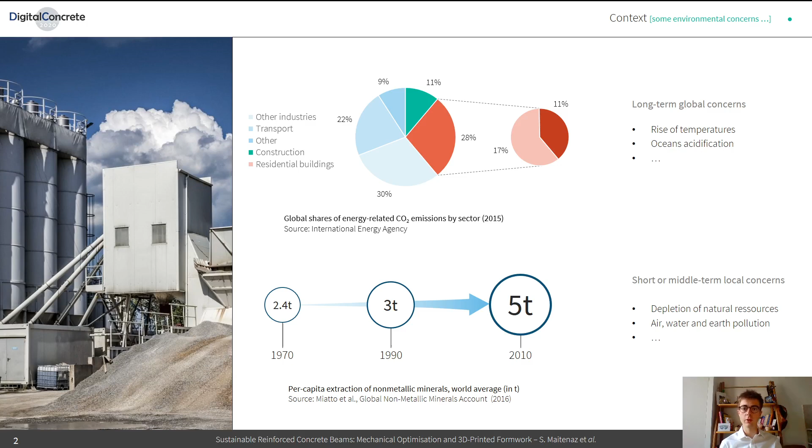Strangely, the construction industry also faces a trend for the oversizing of elements, and the reasons for that are twofold. One is the evolution of cost over time. At the beginning of reinforced concrete systems, at the end of the 19th century, the costs for the production of construction material were high, whereas the labor cost was low. But with technological progress, we were able to reduce the cost of the production of construction material. And with inflation and modification of labor legislation, labor costs tend to increase.

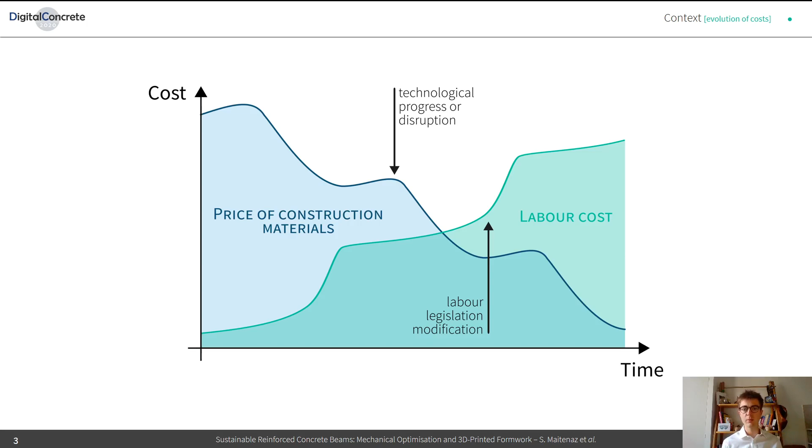Now, general contractors tend to foster the oversizing of structural elements to ease and fasten the construction in order to flatten the impact of the labor cost. Another reason for this oversizing has been highlighted in a survey conducted on 129 chartered engineers in Great Britain, published in the MEICON Report.

This survey clearly shows that structural engineers tend to oversize structural elements because of potential construction mistakes that could occur on site, even though the standard already includes some high security coefficients to take those potential mistakes into account.

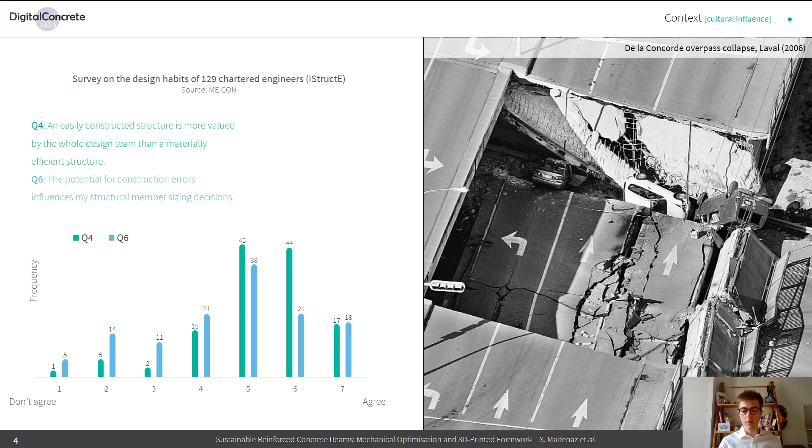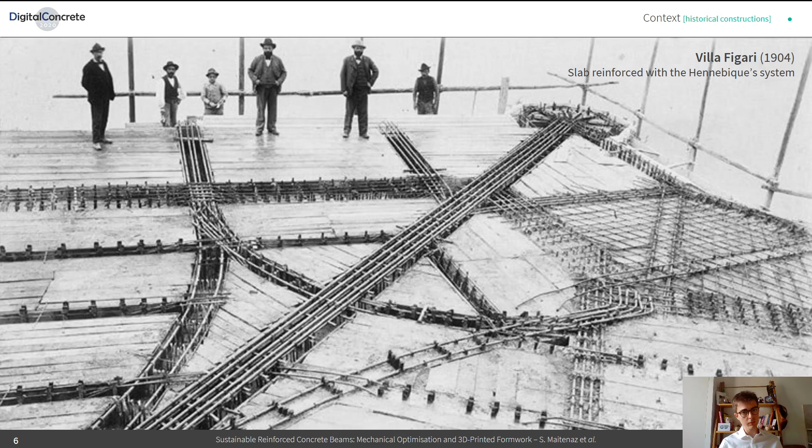But examples from the past, like this slab that was reinforced with the Hennebique system in 1904, show that it is possible, with reinforced concrete, to have structurally efficient structures. Actually, the Hennebique system was the first widespread reinforced concrete system because it was the simplest way to reinforce structures at the time.

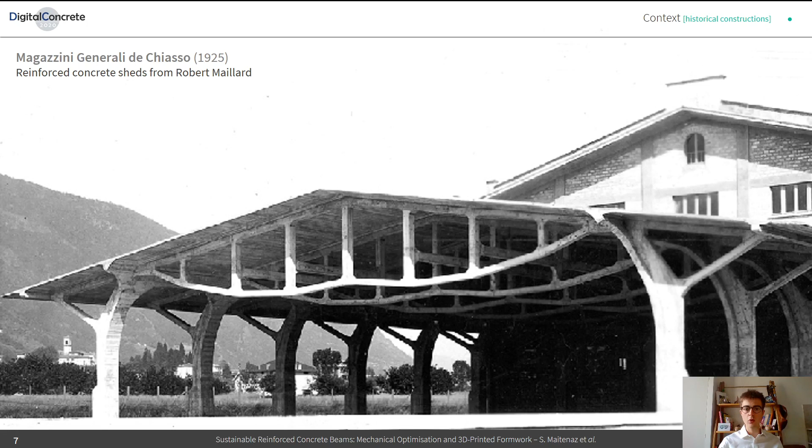Some of you might also have in mind some very nice and efficient designs from Robert Maillart, like his bridges or the roof of the Magazzini Generali.

So what we want to do is to take advantage of digital fabrication to meet the challenges at stake. Those challenges are a better control of the fabrication process and a higher precision, a higher productivity, and above all, a higher sustainability. What we want to do is to use digital fabrication to manufacture non-standard reinforced concrete elements.

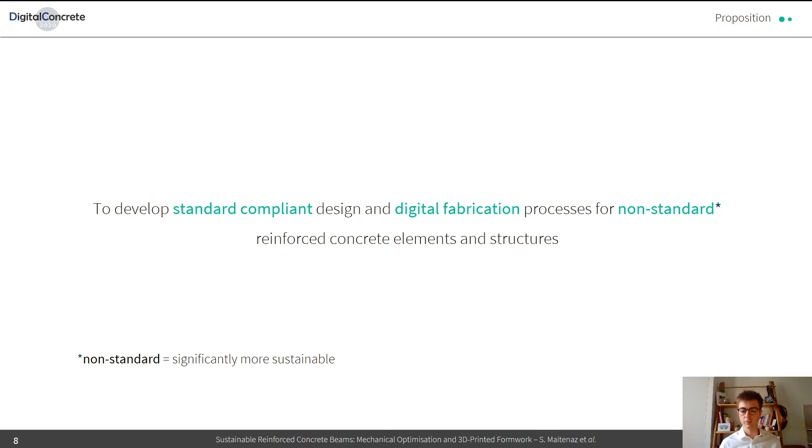But when I talk about non-standard elements, I don't refer to geometrically complex elements or architectural elements, but to standard elements that are non-standard in the way that they are significantly more sustainable than traditional elements. For that, we propose what we call the strut optimization approach, which is completely compliant with Eurocode 2, the current standard for reinforced concrete design in Europe.

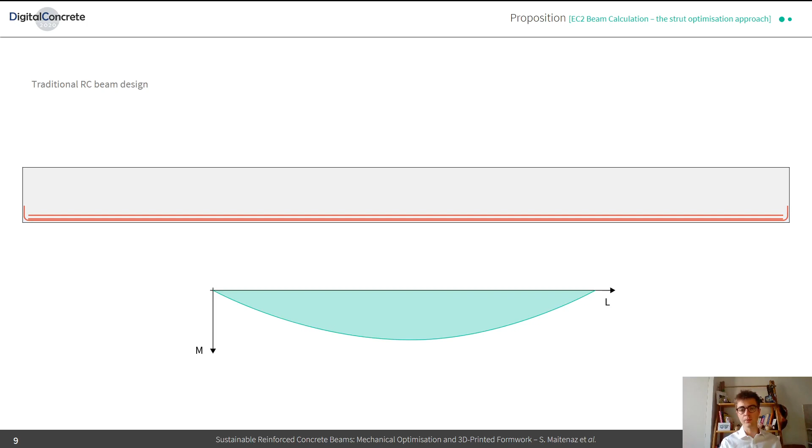So, when an engineer designs an RC beam, given its geometry, so its span, its width, and its height, he will first optimize over the layout of the longitudinal reinforcement based on the bending moment of the beam. Then he will do the same with the shear reinforcement based on the shear forces of the beam.

And eventually, he will only check whether or not the compressive strength of the strut is enough to withstand those shear forces. If it's not the case, he can play with the inclination of the strut to increase its resistance, and this is called the variable strut inclination method. This method is directly based on strut models, truss models that were developed at the beginning of the 20th century by Ritter and Mörsch.

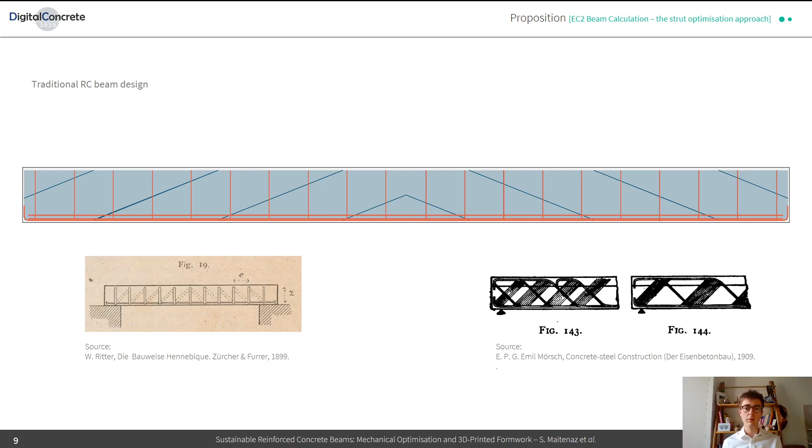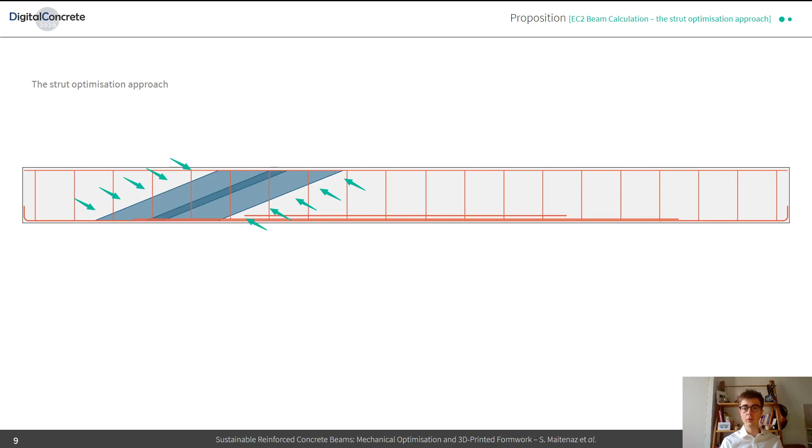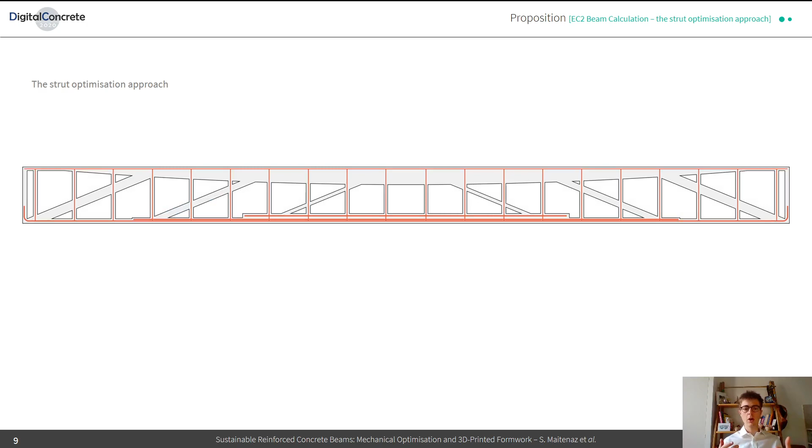What we propose is to optimize the strut of the beams. It's possible to do it in two ways. It's possible to optimize over the width of the struts, but this results in I-type beams, and it's possible to optimize over the height of the beams. This results in truss-like optimal beams, and this is our design proposal that we call the strut optimization approach. Now, how do we build such elements? That's where digital fabrication comes into play.

Our proposal, which is very simple, actually mixes digital fabrication techniques with more traditional ones. The idea is just to print the inner part of the formwork that will produce the void directly on the lost casing, and then to close the formwork in traditional ways, for example with metallic plates, then insert the rebar cages inside the formwork, and then pour concrete.

We've done a first prototype that demonstrated the feasibility of the process, even though we encountered two main issues. One was due to the fact that the rebar cage was manually manufactured on site, and so its precision was far lower than that of the printed part. So we couldn't insert it in between the plates and the printed part. We had to first put the rebar cage and then manually add the printed part. Obviously, this is not what one wants to do with digital fabrication, as we lose all of its advantages like

the precision. The other issue we had was linked to the formulation of concrete, which was much too dry, but for that we don't really bother because we are implementing some self-compacting concrete solutions, which will help us pour the concrete nicely inside the formwork.

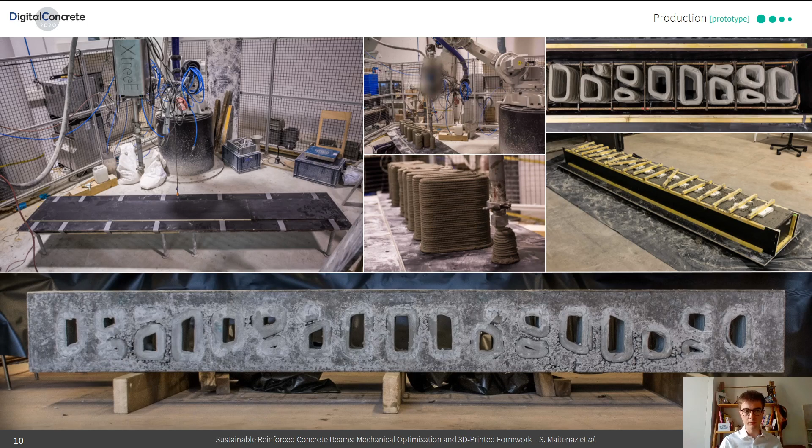So, in order to measure the quantity of concrete that we could save with this approach, we studied a set of simply supported beams supporting concrete slabs and subjected to live loads corresponding to housing loads, so 150 kg per square meter, and we applied the proper ULS and SLS combinations.

Then we looked at the ratio between the mass of the optimized elements and that of their corresponding traditional elements, so plain beams. And we did that for spans ranging from 6 to 15 meters and slenderness ranging from L/10 to L/16. And the ratios we got were ranging from 32% to 78%, which results in concrete savings ranging from 22% to almost 70%.

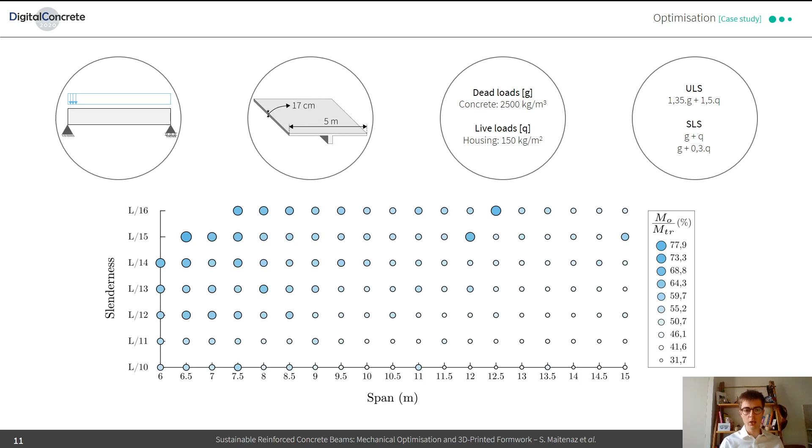If we look a bit more into detail at those numbers, and take the example of typical beams used in a housing or office building, so beams with spans from 6 to 9 meters and slenderness from L/10 to L/12, the concrete savings range from 30% to 60%, which is considerable. If we look at more optimized beams, with slenderness of L/14, for example, or less, we're still able to get concrete savings of about 50%.

There are also obvious indirect concrete savings because we are lightening the whole structure, so we will be able to reduce the sizing of the foundations, but also the columns and the walls. But most of all, thanks to the void and the design of the beam that creates a passage for ventilation ducts, we're able to gain some structural height at each floor, and typically we estimate that for 10-story buildings we're able to reduce the overall height of the building by about 3 meters, which is good both for the insulation of the building and because it will enable us to produce less material for the facade.

So if I talk a bit about the perspectives of this work, regarding the fabrication, I've already mentioned that it was difficult to insert the rebar cages inside the formwork. For that reason, we think that the solution is the automation of the whole production line in order to have the same precision at each step of the process.